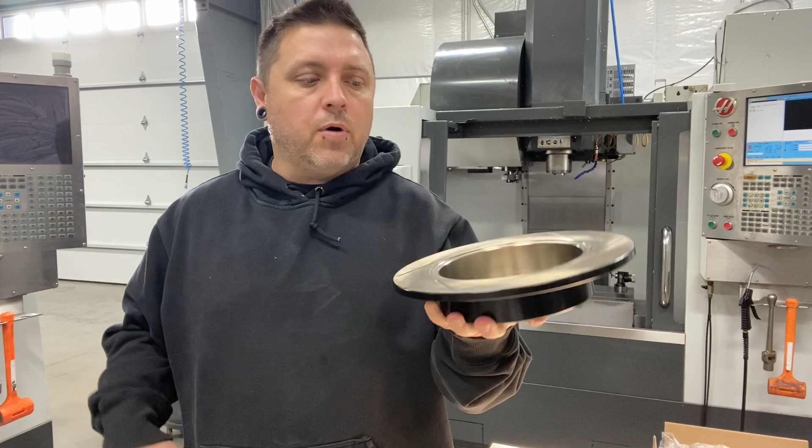But I have been using Fusion a little bit for lathe work. I've done a few jobs on the lathe in Fusion, so I'm getting my head wrapped around it a little bit, but I haven't really done any milling yet. So we're gonna dive into milling today, mainly because I have this project that I do for Kaizen Speed. All we do is open up this bore and put this inside chamfer back on these rotors here. So super simple job. However, I'd like to try to figure out how to automate it a little more.

And typically we pick up the bore of these with the probe on every single part so that they're always perfect. They're always concentric to the bore that was already there. So I'd like to automate that probing if I can. I know that's a function in Fusion that you can use. So I'm going to see if I can figure that out today, and you guys can struggle through it with me.

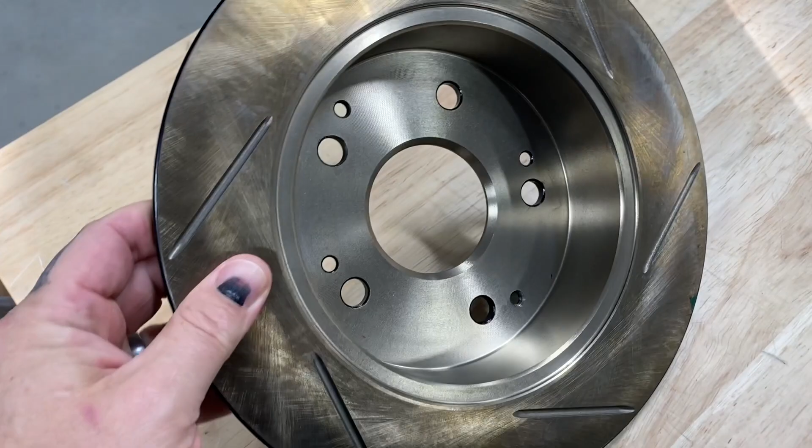So I've done these parts many times in the past. I already have a program. I already have jaws cut for it. But it's such a simple thing. So these are the jaws I have cut. It's such a simple part that I'd really like to use it as a learning platform for me to start getting into Fusion a little heavier.

I am attempting to basically change over all of our programming and modeling into Fusion instead of the old software I've been using, mainly because of cost. Some of those other softwares are very, very expensive, and Fusion, for the base seat, is only like $500 a year. So that's kind of a no-brainer as we go forward here. And you still get 95% of the functionality. Some of it's not quite as refined, I would say. But for the price, you're getting 95% of the functionality for a 20th of the price.

Plus, you have milling right in the software package. So that's, or machining, I should say. So that's a huge benefit. So that's why we're kind of getting into this. All right, so getting into Fusion here. Okay, so we have a new untitled drawing here. So we are in design, so we can start with designing the model.

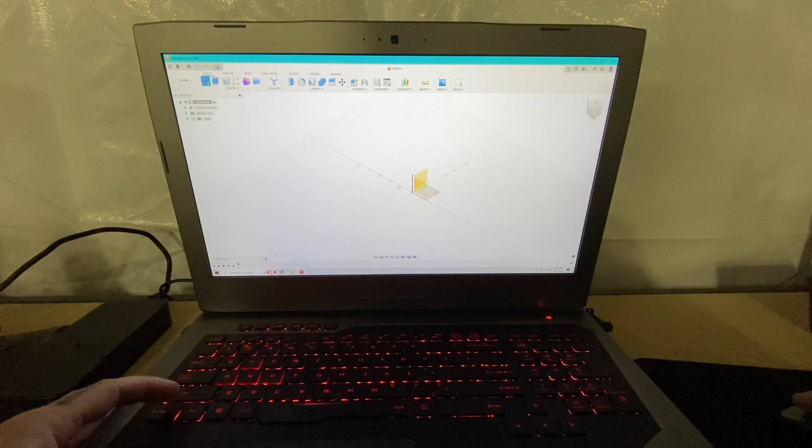This is going to be a really, really simple model. We basically just need a hole and a chamfer. So none of the outside profile of that rotor matters. Only that bore matters. So, okay, we're going to start our sketch on the top plane here. Well, I don't know what they call that actually, but we have X in the left to right direction, Y in the, I guess, forward and aft direction, and Z is straight up positive towards our view here.

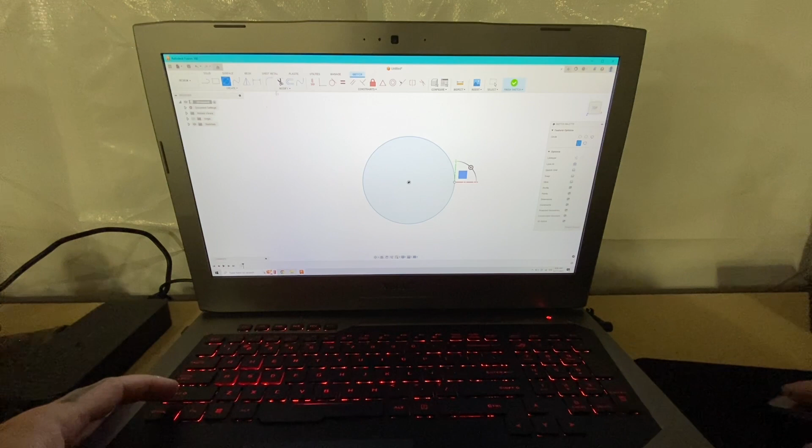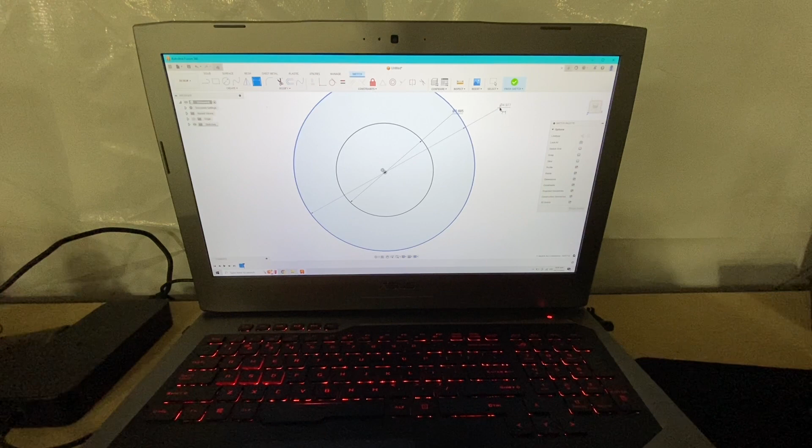So we just need to create our model here. So I just picked the circle. We're going to give it a dimension of 68.2 millimeter. So that's the bore dimension that Kaizen Speed wants these to be at after we machine them. And we're just going to give this another circle out here representing the rotor face. We can just give that an arbitrary dimension because it doesn't matter. So we'll just say 5 inches.

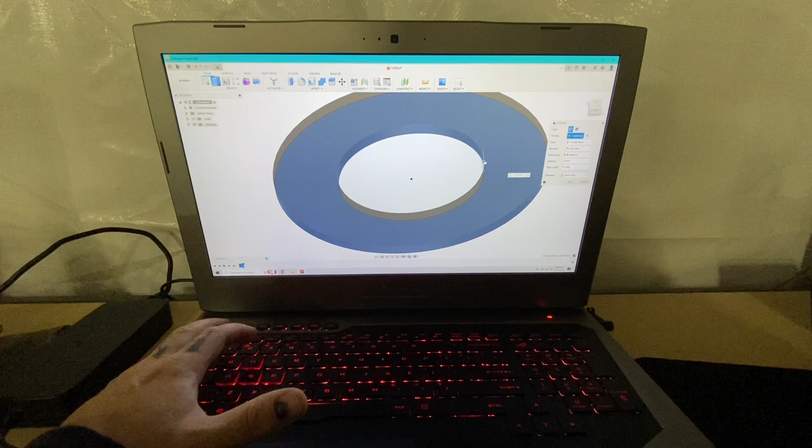And then we're going to hit the E button for extrude. Alternatively, you could go up to here to solids and hit this extrude button, but E works good. We'll select basically the closed contour that we want, and then we'll give this a dimension. I'm going to go measure that rotor and see how thick it actually is. So the rotor face is about 218 thick. Oops. Let's go back to that.

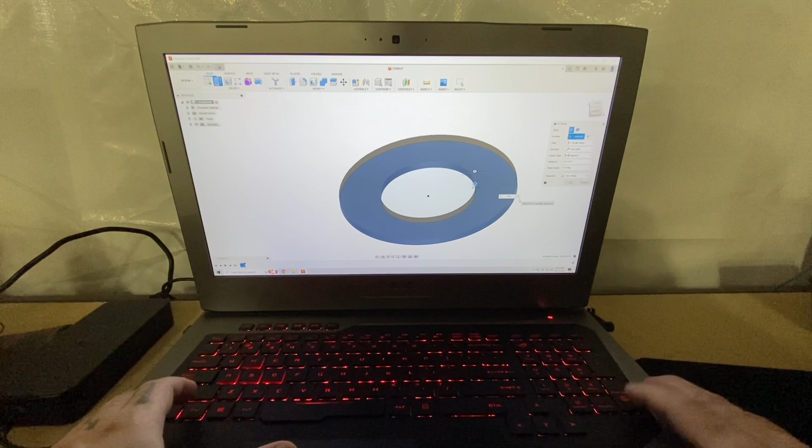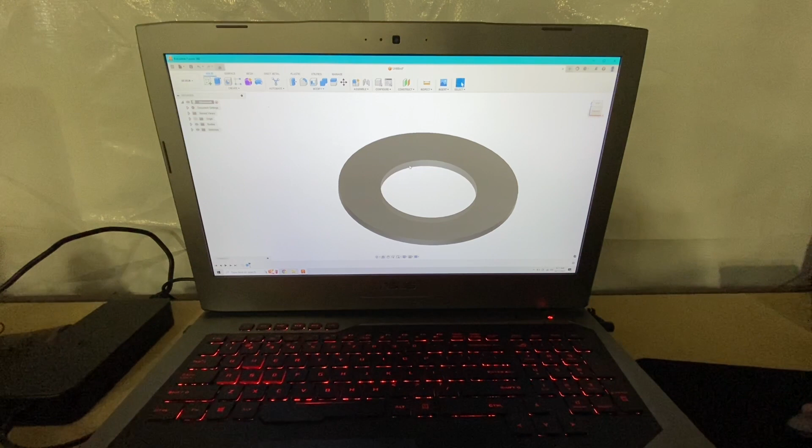0.218. Enter. So now we have our thickness, and now we need to add our chamfer on here. I'm going to measure that chamfer as well and see how big I believe that chamfer to be. So we have about 80 thou left of this thickness. Once the chamfer is there, there's about 80 thou left of the flat.

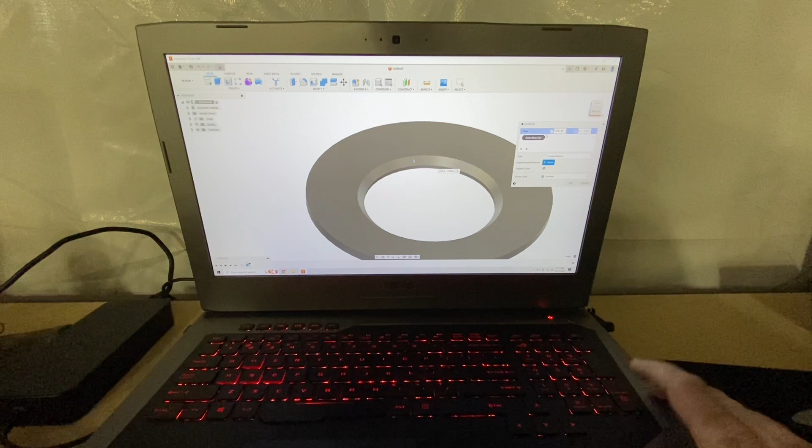So we're going to go up here to our chamfer tool, and we'll select this edge. That puts our chamfer at 0.218. Let's see if it'll do the math in here. Minus 0.08. Yep, so it does the math automatically for us. If we go edit this feature, I guess it doesn't actually tell us the math, but it does it for us. So I guess that's 138 thou or something left. So this chamfer is about 138 thou.

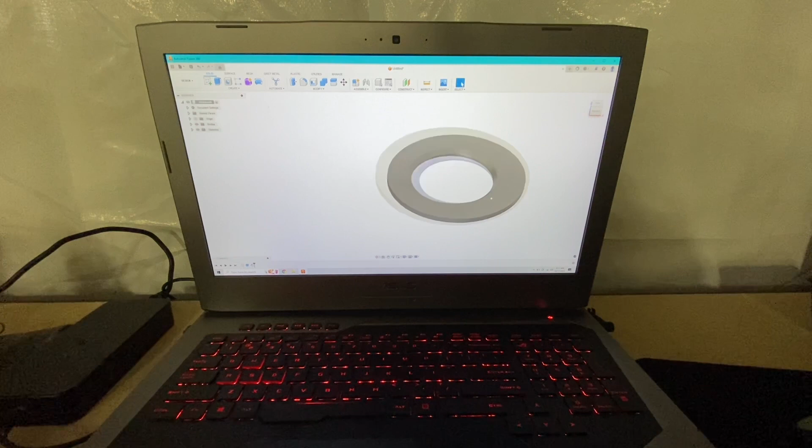So that should be all we really need as far as the model goes, because we're just going to be milling out this inner diameter and then putting the chamfer back on there. So that should be all we need. So let's switch over to manufacture here, and we'll get started.

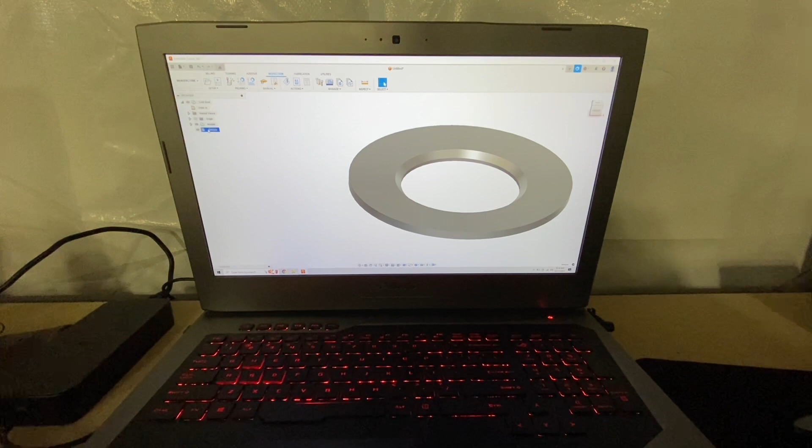So the first thing we have to do is do our setup here. So we're going to make a new setup, I should say. So this is basically the material that you're going to be machining away. So it's your stock material. In our case, we have basically a really short length tube. So let's see what we can do here. That's our work coordinates. Looks correct. Origin looks correct.

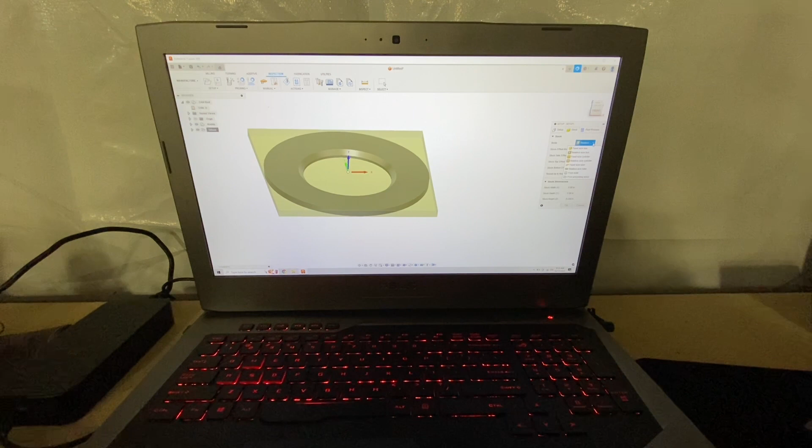Let's go to stock. So we're going to do a fixed size tube, probably. So stock diameter, 5 inches should be fine. So that's the outer diameter. Inner diameter is what we're going to need to change here.

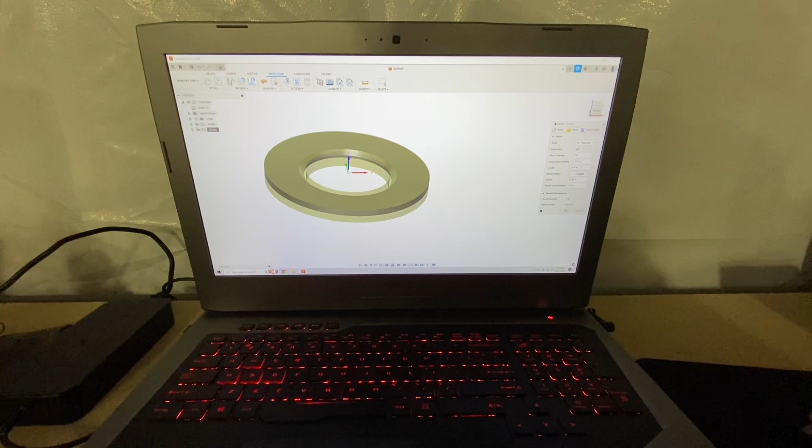So our rotor, I'll measure it right now, currently has a 2.532 inner diameter. So we're just going to put that number in here, 2.532, and then our length is going to be the same as what we measured our rotor to be, which was 0.218. So now we have our stock. So this is all we have to cut away just to change that bore diameter.

I haven't used milling yet, so let's see if we can go select the right machine here. We're just working on a VF2 SS. Looks like we have VF3 SS. It's got to be in here. It's their literally most popular machine, but maybe not. Let me go see if I can find it on their site. So it looks like they don't seem to care about the SS feature on the machines.

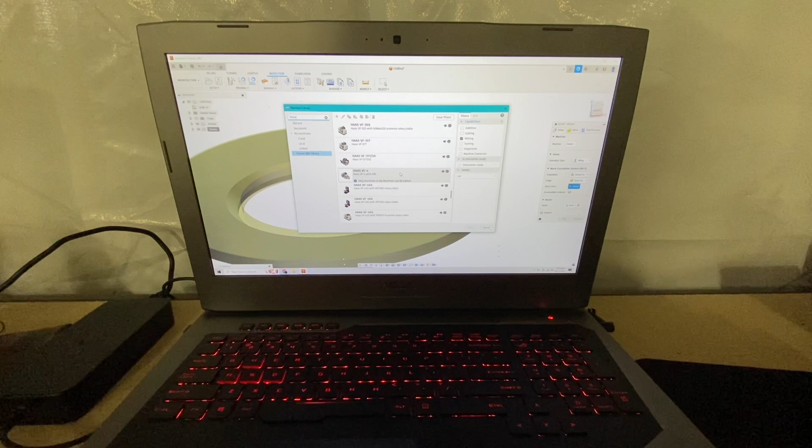So I suppose we'll just use, let's see. They do have an SS VF3, which is strange. But we'll just use the standard VF2, and we'll select that for now. I'm not going to bother with modeling the actual machine layout right now.

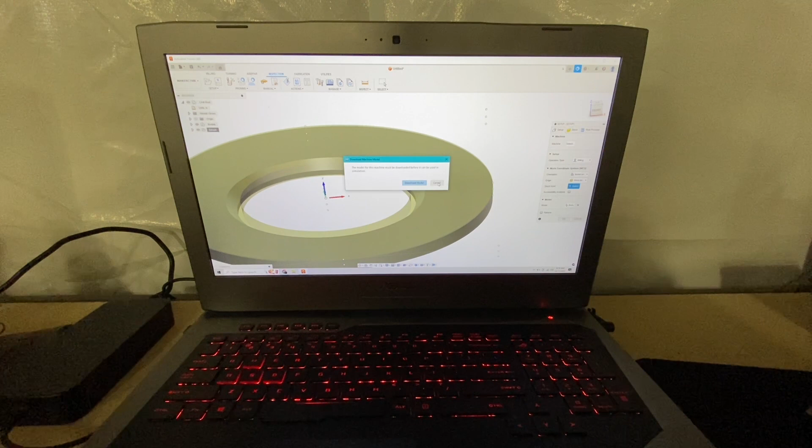So I guess in reality, this must just be like the 3D rendering of the machine, and then in our actual post processor we should be able to pick, I would imagine, the SS model of the VF2. So we're just going to cancel this. Let me look through these. So we have milling, our work coordinate system looks to be correct. Stock point, blah, blah, blah, stock. And then post process, our output for our number.

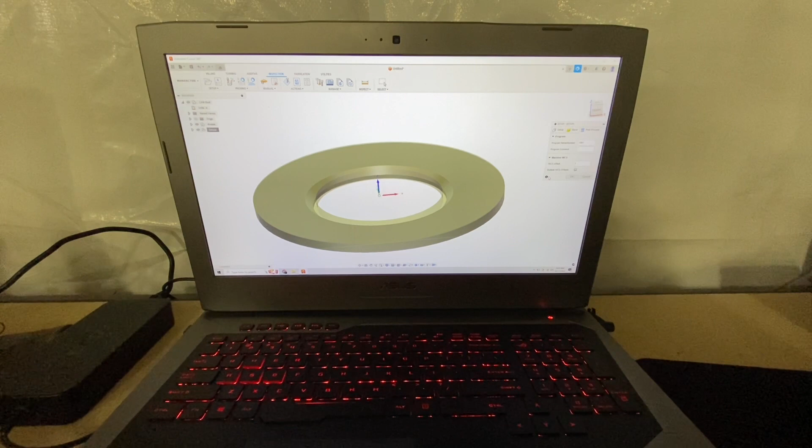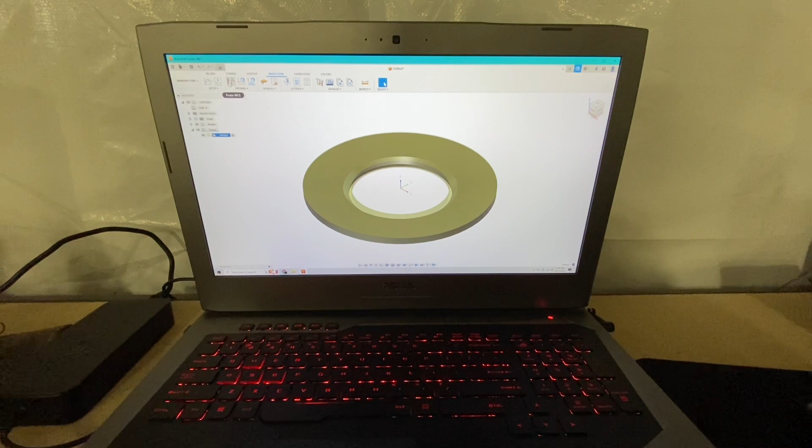We'll put work coordinate system 1, which will be a G54 work coordinate system. So we'll say OK there. So now our setup should be pretty much done and ready. So then we can go into milling here. It automatically populated this. But actually, I want to try to figure out probing. So it's probably inspection, probe work coordinate system. That sounds like what we want to do. Let me play with this a little bit, and then I'll show you what I've figured out.

All right, so here's how I think this is going to work. We're going to go to inspection, probe work coordinate system. We're going to select a tool. In the tool library here, there's probes under the Fusion library. And then I just clicked down to figure out, this one looks like mine. So that's the one I'm going to select. They're all 6mm ball, which is what I have, and I'm sure you can edit this tool and change that if you have a different stylus. But we're going to select that.

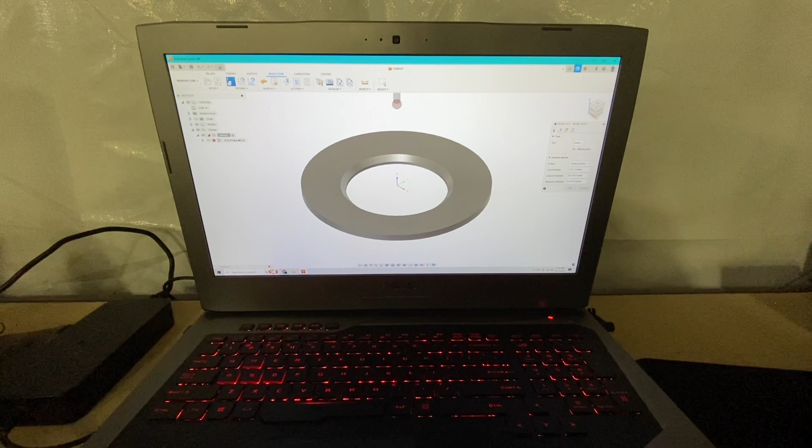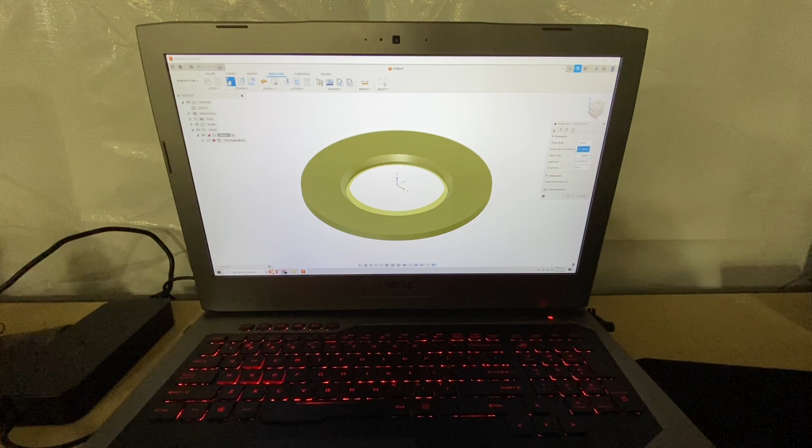It automatically populates some feed rates here, and they look to be relatively normal for probing. So I'm just going to leave those the way they are. And now we get to figure out our geometry that we want to probe. So we're going to probe, let's probe stock. And then, so now it's showing us the stock, and we need to select the surface we want to probe. So we're going to select this inner diameter.

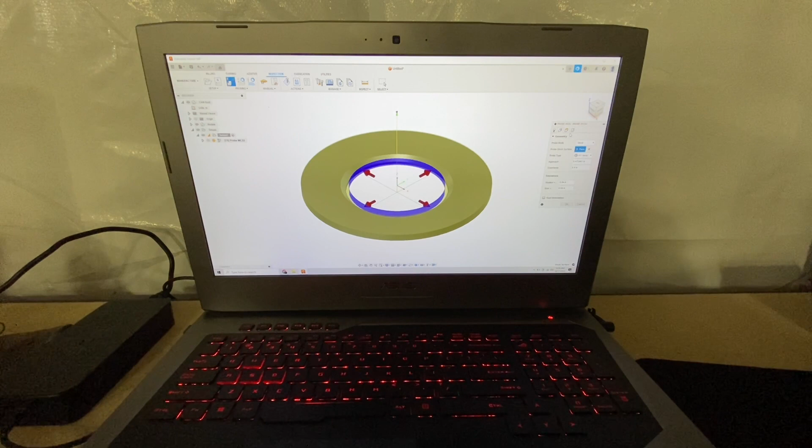That looks like it's correct. XY circular hole. Approach distance, over travel distance, where it'll alarm out if it over travels. Position tolerance seems to be okay. So now we've got to do our heights.

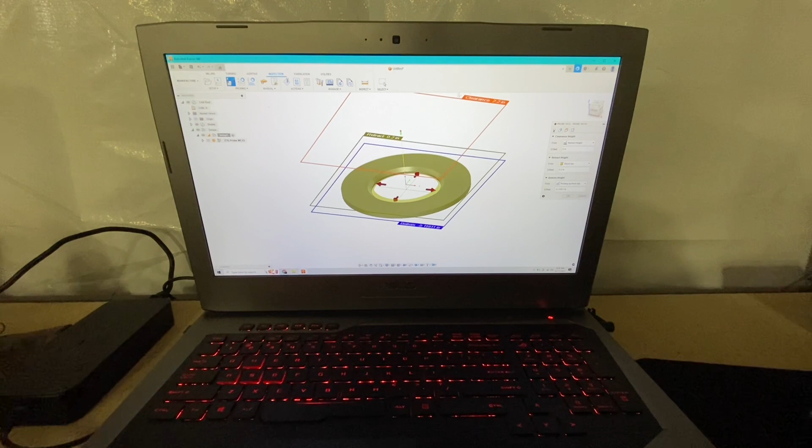So this is our clearance height, which is probably good considering that's up and outside of the realm of the rotor itself, since the rotor kind of comes up. Sorry, my mouse is funky. Rotor comes up and out, so this will be plenty of clearance for that. And then we have like a feed rate clearance, which is our retract height. So that's our stock top plus 0.2.

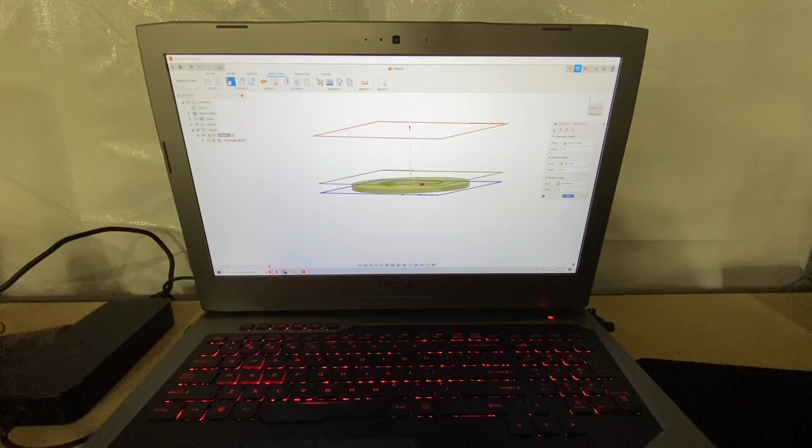That seems just fine. And then we have our bottom height, which is basically where it's going to probe. So let's do stock bottom plus, our flat that was in there was 80 thou, so we'll go plus 0.04. So that puts this probing depth basically right in the middle of our flat that's already there on the rotors.

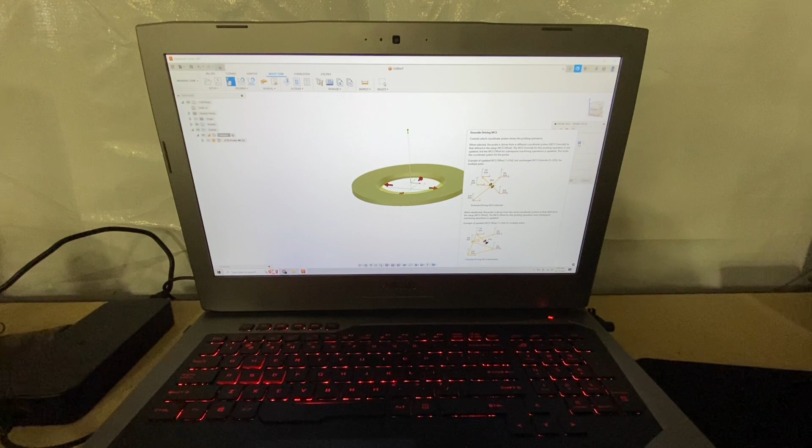So let's go over here. Work coordinate system. So work coordinate system to be updated is 1. What is this? Okay, so this basically says that we need to use a single work coordinate system, or we can have a home position and then have it update to a different work coordinate. So I think just leaving that the way it is is correct. We'll see. I might have to play with that later.

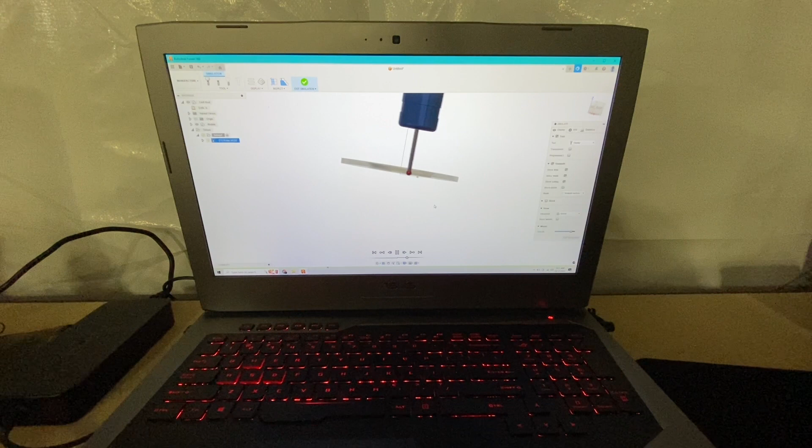But let's just click OK. And then everything calculated correctly. So let's simulate this. So it comes down, looks to be probing at the right depth. So it probes our bore, sets our work coordinate system position, and we should be good there. We'll see when we go to actually run it what happens, but it looks correct to me.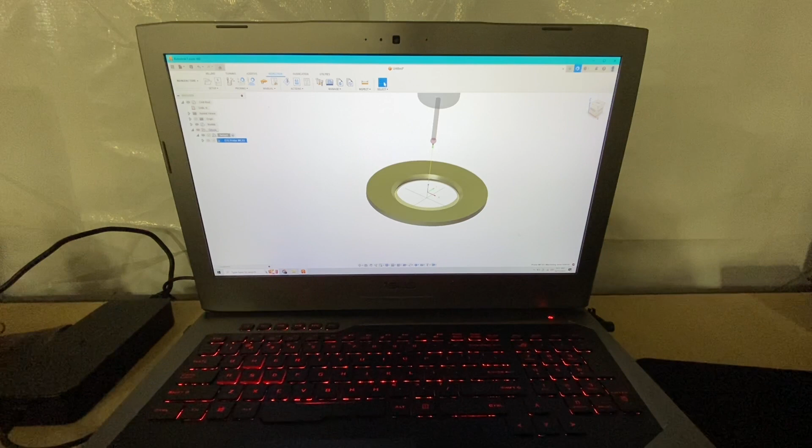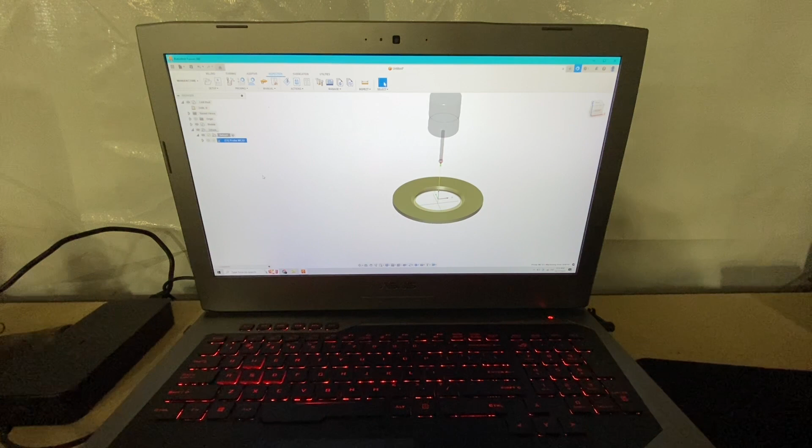So previously, I would have to basically manually jog this down, touch off on every single part to make sure it was right, and then run the program. So in this one, I think that we're going to just have to touch off the first one, and then from that point on, it's going to probe that bore at the beginning of the program and automatically set the work coordinate system to be the center of that bore, which is kind of automating the process a bit and seems like it'll be much better to me.

Remember, our focus from a previous video going forward into the future of LPS Fab is automation. So any efficiencies I can add during the programming of parts and fixturing and things like that are always going to be a plus. Something like this part, maybe we could have done 3 at a time in the machine or something like that. But they typically only send me about 10 of these at a time, so there's no real point in getting crazy with the setup and cutting jaws and all that kind of thing. But I think this probing is going to enhance efficiency pretty good.

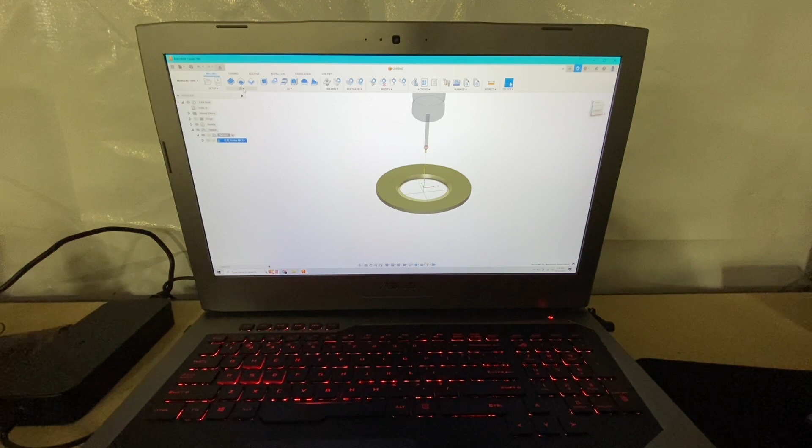So let's keep going here. So we're going to click over to milling, and we need to basically rough this out with an end mill, probably just a 1/2 inch standard steel cutting end mill that we typically use. So we're going to be in a 2D toolpath here. We've got adaptive clearing. Let's see what our options are here. 2D adaptive clearing, so that's kind of like a high-speed machining style toolpath.

2D pocket, face, 2D contour, so that's outside profile, looks like. I guess it could be inside profile depending on the geometry. Got a circle mill here. So not a whole lot of options in the base Fusion 360 package, but it looks like there's plenty of options to do what we're trying to do.

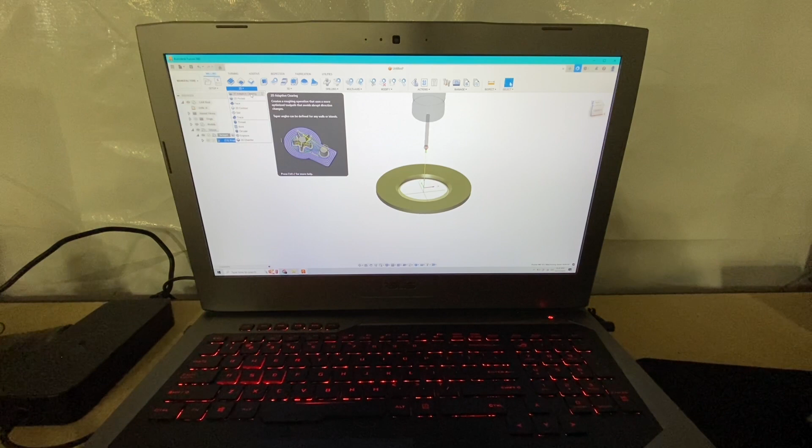So I prefer adaptive clearing. Let's see if we can make that work. Okay, so we're gonna pick this adaptive clearing. This pulls up our little manager here. We're gonna turn coolant off.

Just because this is cast iron, it doesn't really need coolant. We're only taking a little bit off, and we're going to have some fairly slow feed rates. We need to select our tool. I've made an extra tool library here for my VF2 tools. I copied the probe and put it in this folder, and then I copied another tool that I had used in the lathe, which is this 1/2 inch end mill. I just put that in this folder as well so that I can select that, since I knew it was already kind of set up.

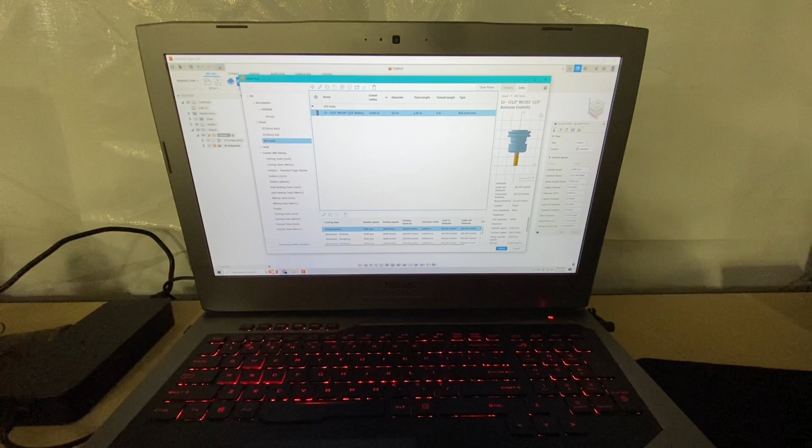So this is a 1/2 inch bullnose end mill. It's got a 15 thou corner radius, 1.25 inch flute length, 3 inch overall. It's running at, looks like, cutting feed rate is 18 inches a minute at 2292 RPM, or 300 surface feet per minute. So that should be fine for what we're doing. So I'm going to select that tool. And then we'll just basically go through this little manager one thing at a time.

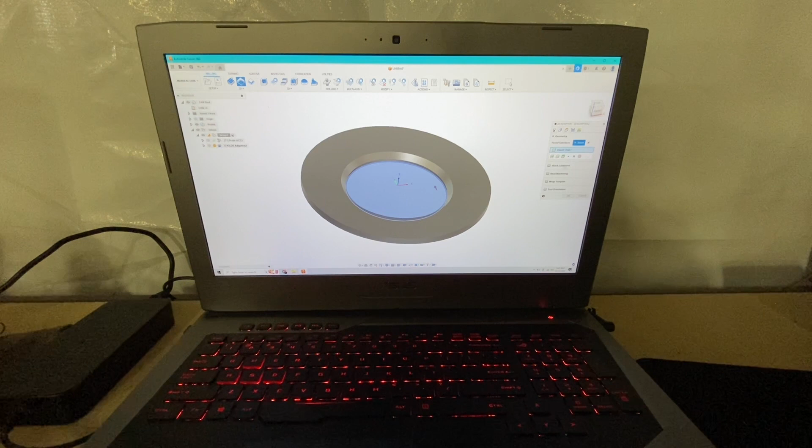So we're going to have to select our contour. We need to select this inner contour. So I'm just going to pick chain. I'm going to select this bottom chain here, and then make sure the arrow is going the direction I want to be climb milling. So that looks correct. That means the cutter will be spinning this way and climbing up the part basically. So that looks correct. We'll say okay. We don't need any of this other stuff, it looks like.

So now we've got to go to heights. So we have a clearance height, a stock top height for our retract, an actual stock top height, so that's got a 0 offset in it. The retract has a 0.2. And then our bottom height is selected contour, so we can select from all these different ones, but selected contour seems good to me since we picked that bottom contour. However, our end mill has a bullnose on it, so we want to go past that a little bit. So I'm going to go minus 0.030 on that to make sure it cleans up that bottom edge without leaving a little sharp radiused thing at the bottom there.

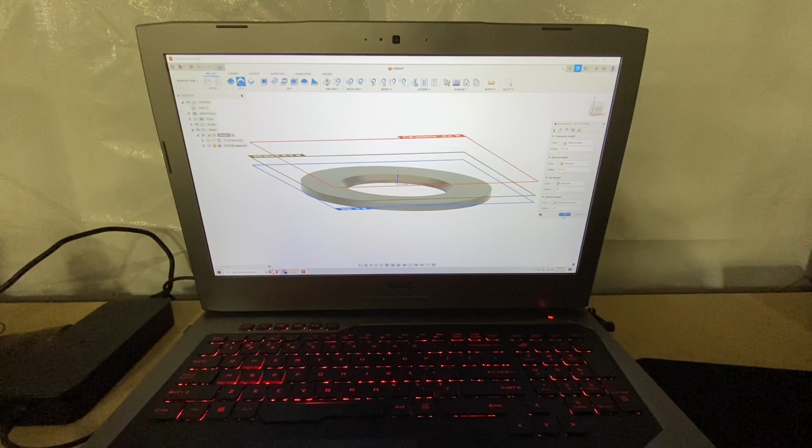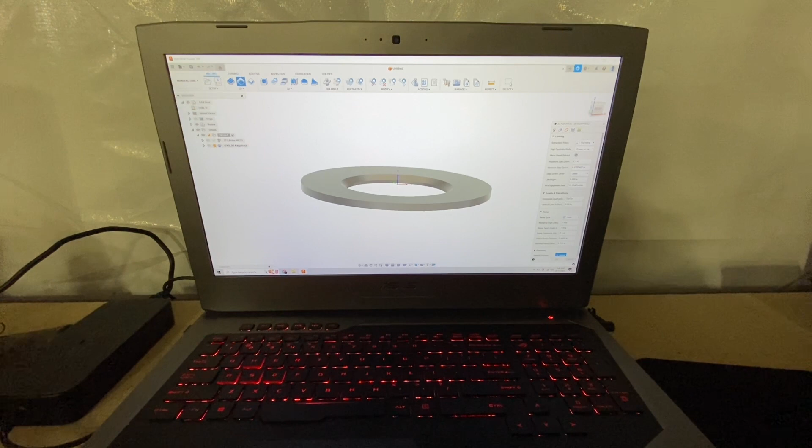Now we'll go to our passes. It looks like optimal load is kind of our step over, I guess, if you will. So we're not taking a ton here. We're going fairly slow. It's cast iron, cuts easily. So we're going to leave that at 0.2. If I was cutting a harder material, I'd probably turn that down a bit. But I think that we'll be okay there. Climb milling is correct. Stock to leave, so we're leaving 20 thou for a finish pass. That sounds good to me. A lot of this stuff is already populated with relatively rational data, I guess. So we're not ramping, we're not doing any of this. So let's just say okay and see what happens.

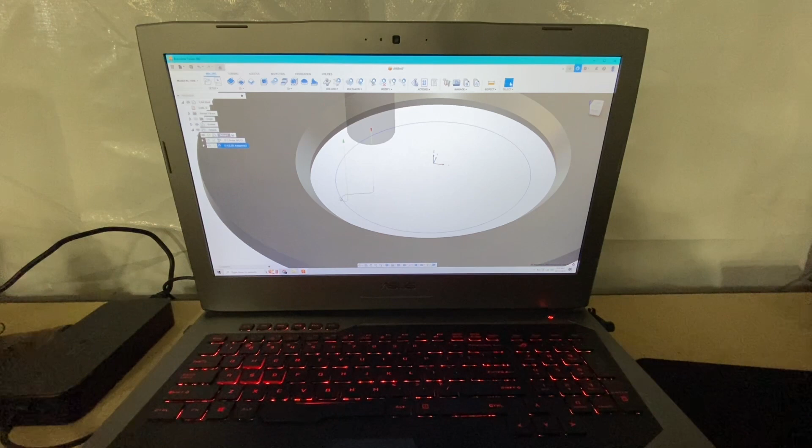Okay, so we get a kind of a rapid down into the hole, it looks like. We get a feed in, and we get a nice contour. This is center line of the tool, that's why it's offset from the surface. And then it ramps out, it looks like. So let's simulate that. So I'm just right clicking on this, clicking simulate, and then hit play. So, yep, that looks like exactly what we need. So we'll exit that simulation. That looks perfect. So now we need to do a finish pass.

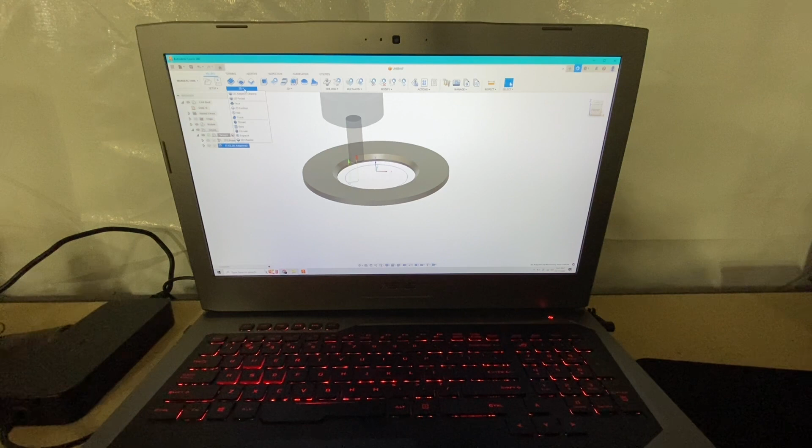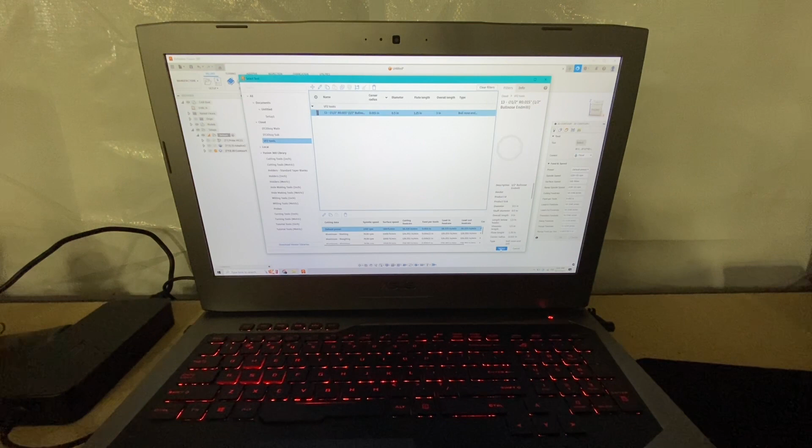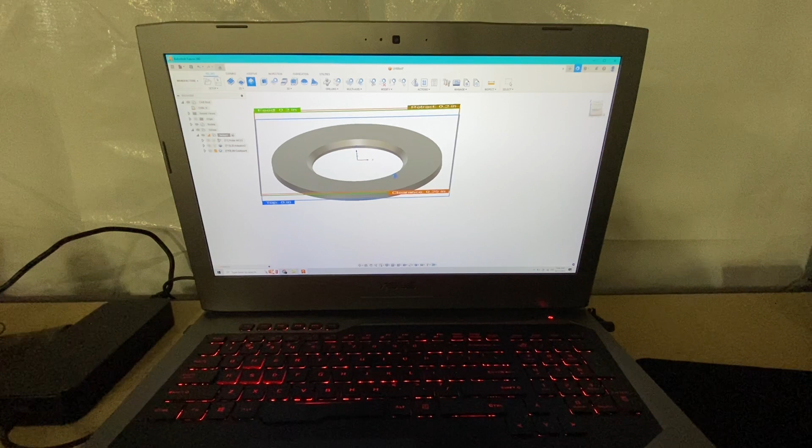So let's see, probably 2D contour would be our finish pass. So same thing, go through the menu, populate it, see what you can figure out. So we'll select the same tool from our VF2 library, select, turn the coolant off, disabled. Geometry is going to be our bottom chain. Okay, heights. Again, we'll add this negative 0.03 in here. That should be good. That should be our finish pass.

Okay, so this chamfer I've had to mess with a little bit. It seems the chamfer function in Fusion doesn't have a multi-passes feature. So what I've had to do is I changed the height here for our selected contour, which is our face, the face of the chamfer.

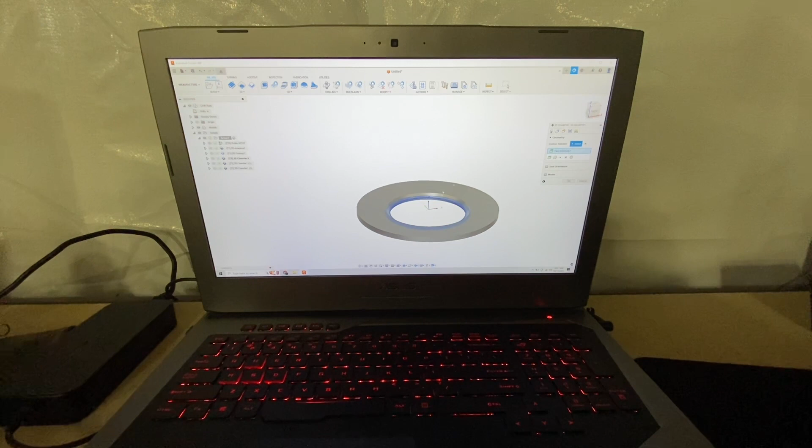Here, I'll just go through this. So our chamfer face was our contours. After selecting that chamfer tool, my tool is a 1/2 inch 90-degree chamfer with a 30 thou flat on the bottom. Had to kind of modify that in the tool manager.

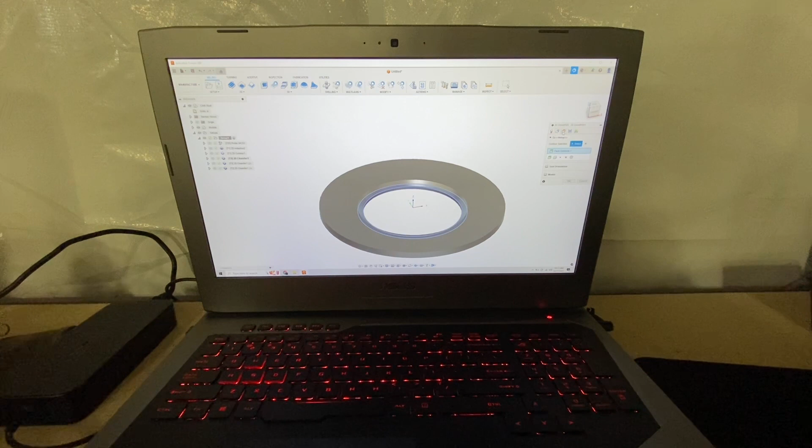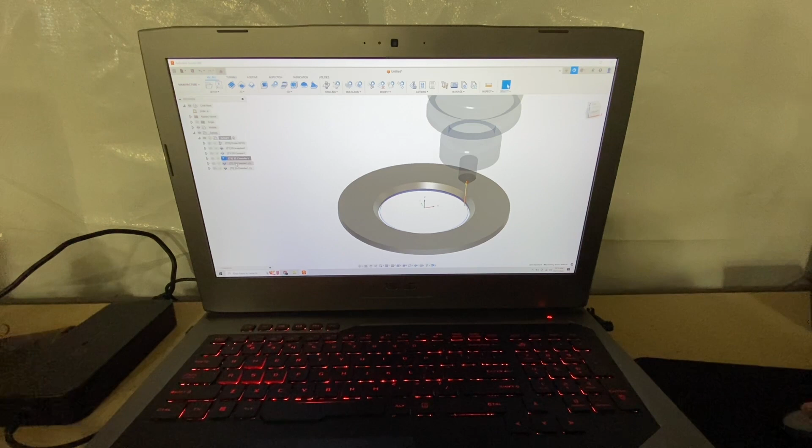But on our heights here, this is a pretty big chamfer to take in one pass. So I basically offset our selected contour by a couple passes here. So this one has a 50 thou offset. This next one, all I did was take this and I hit duplicate, and it added another one here, and then I changed the offset in this one. So this one's 20, and then this one is 0.

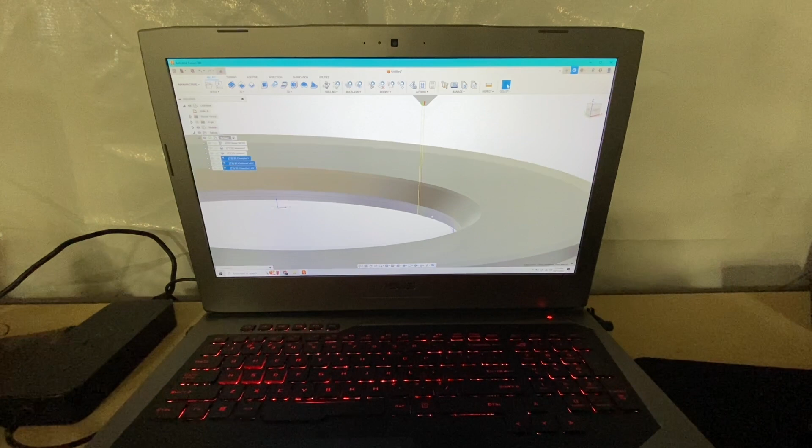So basically what it does is it makes 3 different height passes on that chamfer. So basically like 2 roughing passes and a finish pass. Because the chamfer operation doesn't give you that option, at least as far as I could figure out. But I think we're pretty close here. I think we've got everything we need. So I'm going to figure out the post processor and get this onto a USB and over to the mill, and we'll see what we can figure out.

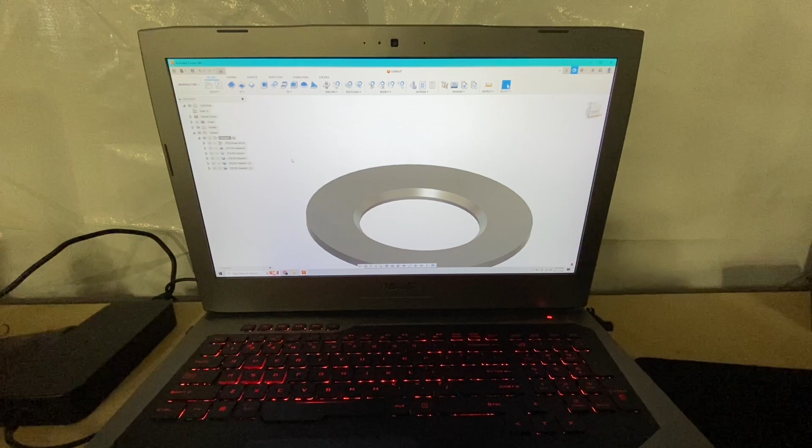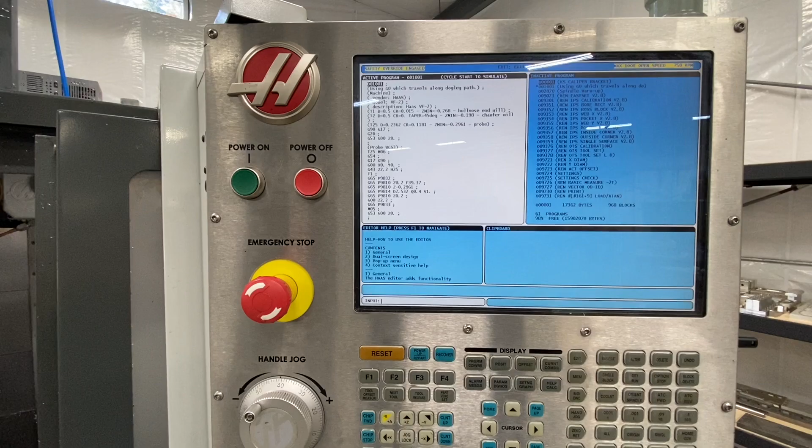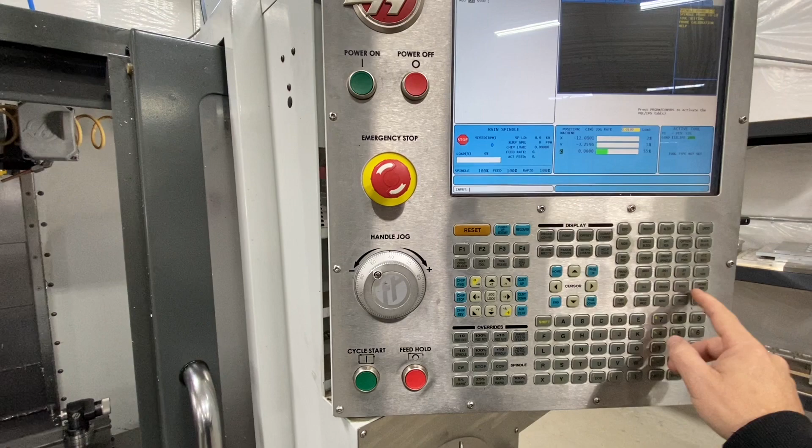Okay, so I've got the program loaded. I cannot watch it in graphics mode because the probe fails. So that's kind of sucky, but we'll just go slow through this and see what we get. So first thing I need to do is call up the probe. Oops. Cancel, delete. So we need to touch off this first part manually so that it knows where G54 is, so that it can probe the next one, if I understand it correctly. So I'm going to go ahead and do that.

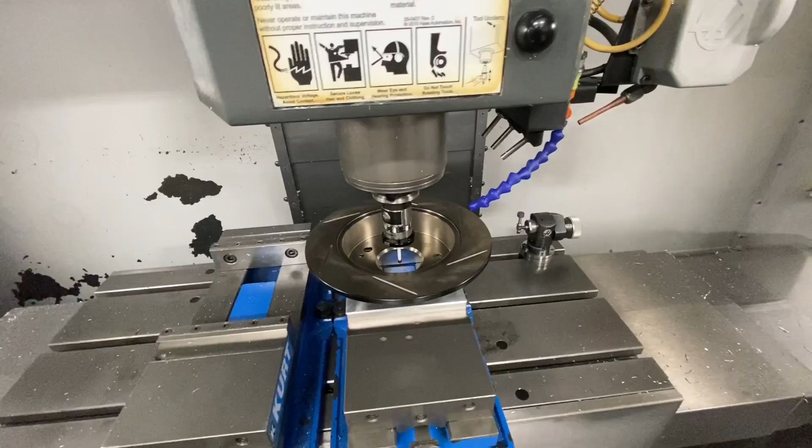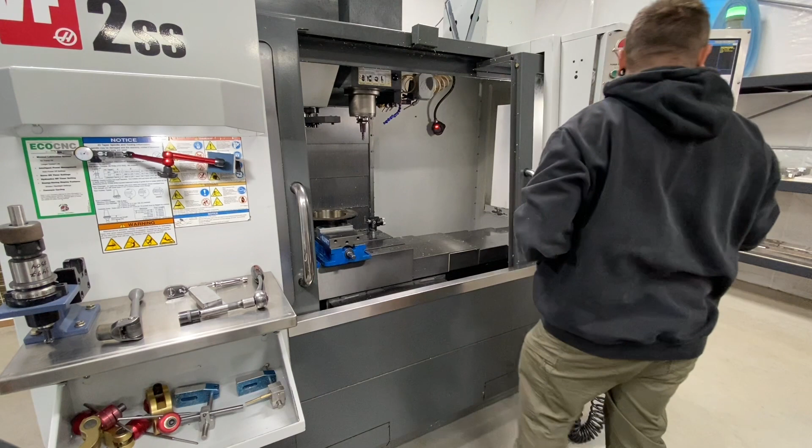Now I need to load up my tools and get them touched off. So we're on tool number 1 and tool 2. And now we're going to touch off those tools. Now that that's all done, we're ready to run our program.

Okay guys, so I've never done probing via CAM before. So we're going to take this really slowly and just work through this program in a safe manner. So I've got my rapids down, I've got my optional stop turned on, and let's just see what happens here. I'm going to go to my distance to go page. So I have 1.4 inches to go in Z. So that looks correct. It looks to be centered in the part. So looking good so far.

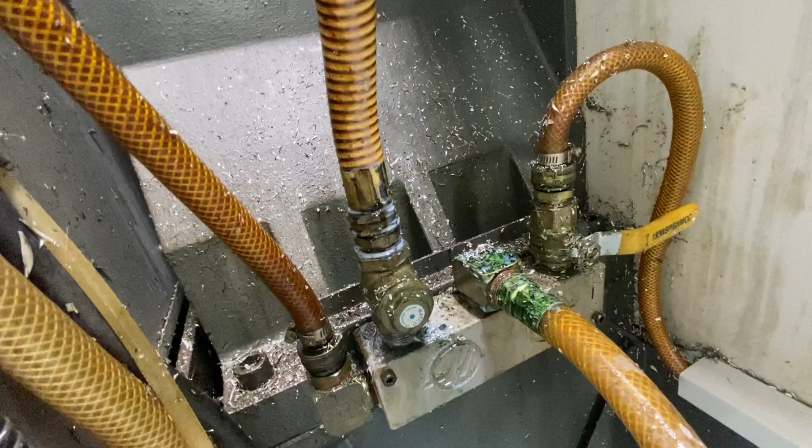Well, we know the probe works, so let's just go to tool 1 in the program here. We'll start there. So far, so good. Although when that coolant came on, I heard some funny coolant trickles back here. And it looks like I've got a hose failure somewhere up in there, which sucks. I guess something else happened in the move. All right, let's run the last tool here and see what it did.

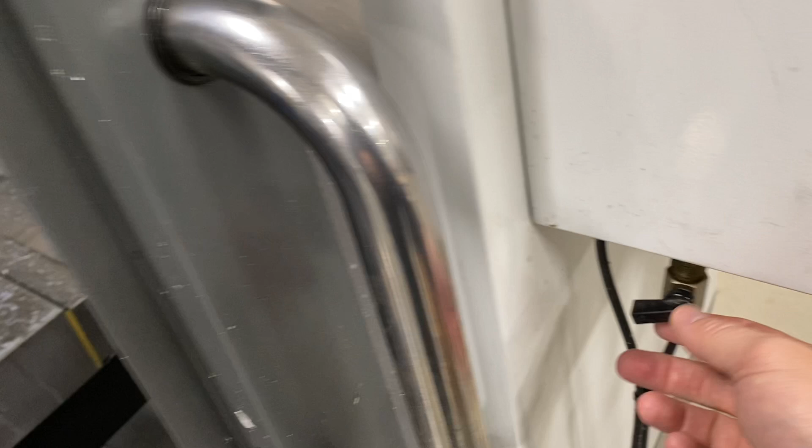I have a little air blast hooked up to this little valve here. Helps when you're cutting dry like this. Blows the chips away so you don't recut them.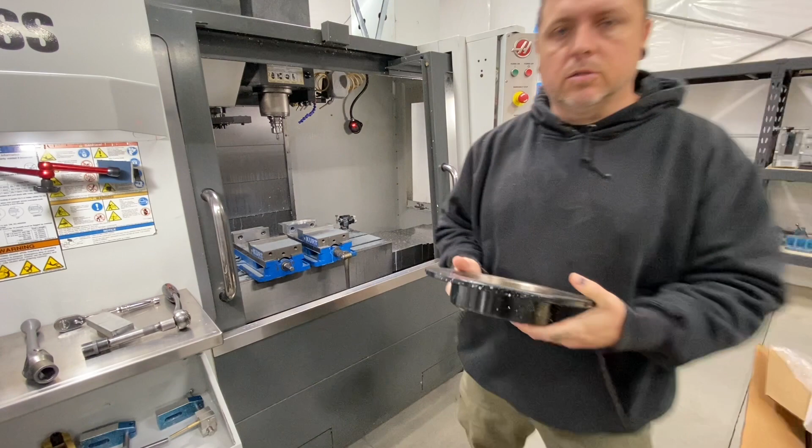Pass. I could probably change that ramp in a little bit. Sounds like it kind of comes in a little hard right at the start. Chamfer looks to be perfect though. So, there you go. All done. So, success, I would say, for our first try milling in Fusion 360.